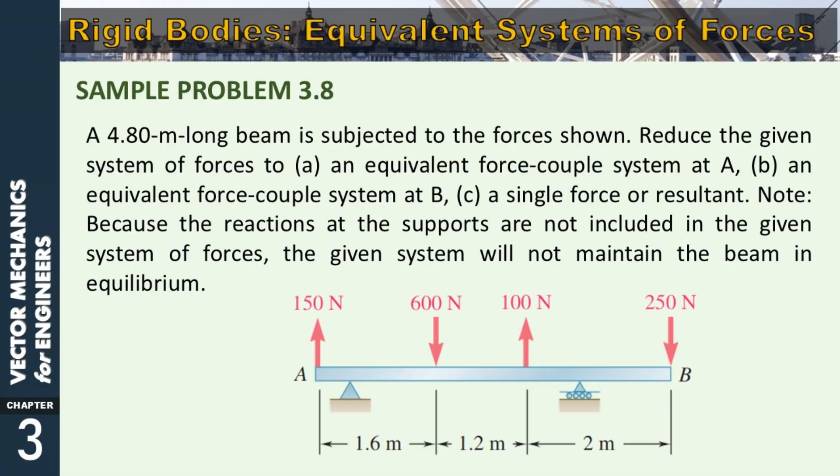We have here sample problem 3.8. A 4.8 meter long beam is subjected to the forces shown. Reduce the given system of forces to: for letter A, an equivalent force couple system at A; for B, an equivalent force couple system at B; and for C, a single force or resultant.

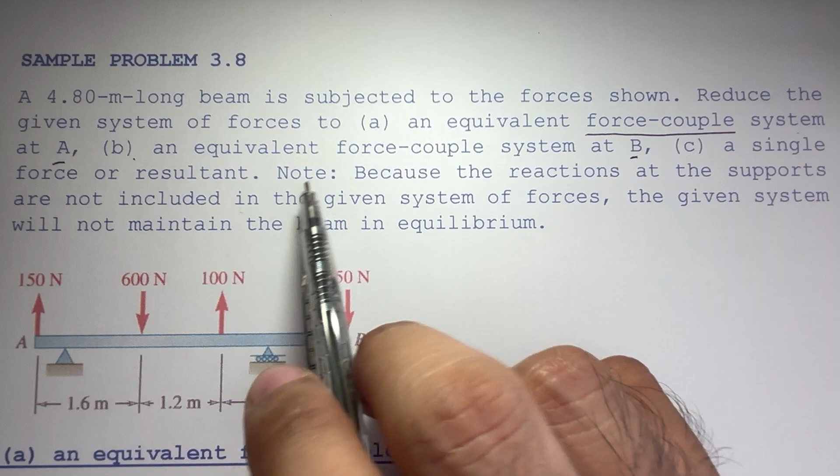Note, because the reactions of the supports are not included in the given system of forces, the given system will not maintain the beam in equilibrium. So for this example, our reactions at the supports are neglected. So for our forces, we have here our beam. If we try to redraw our system, our beam would have no reactions at the supports.

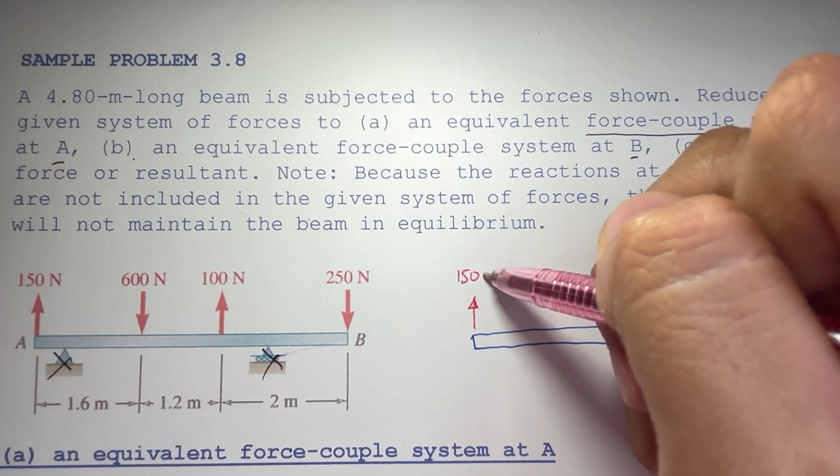So we have here our 150, since it is going upward, that means it's in the positive J direction, so we have 150J. For our 600, downward, we have negative 600J. For 100, we have 100J. And for the 250, going down, we have negative 250J.

For its distances from point A, this is point A, this is point B. Our 150 here, since it's located on point A, has no distance. For our 600, from point A going to that direction, we have 1.6 meters, so we have 1.6 positive I.

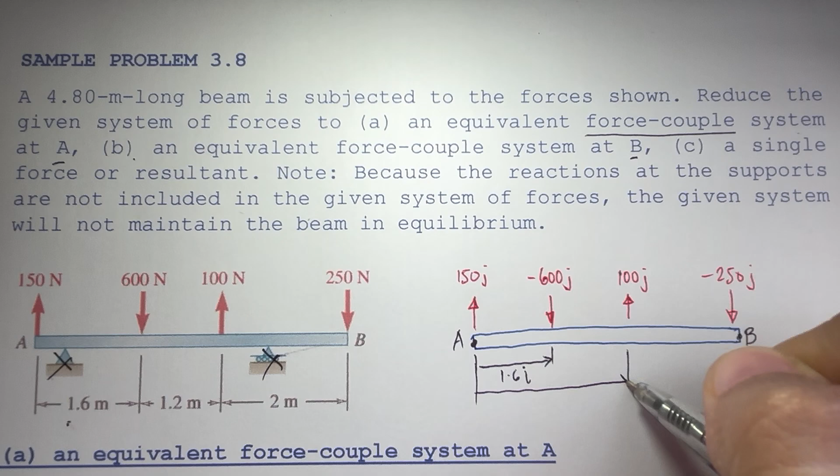For the 100, we have 1.6 plus 1.2, which is 2.8 positive I. And lastly, for the negative 250, from point A going to that direction, positive I, we have 1.6 plus 1.2 plus 2, which is 4.8 positive I.

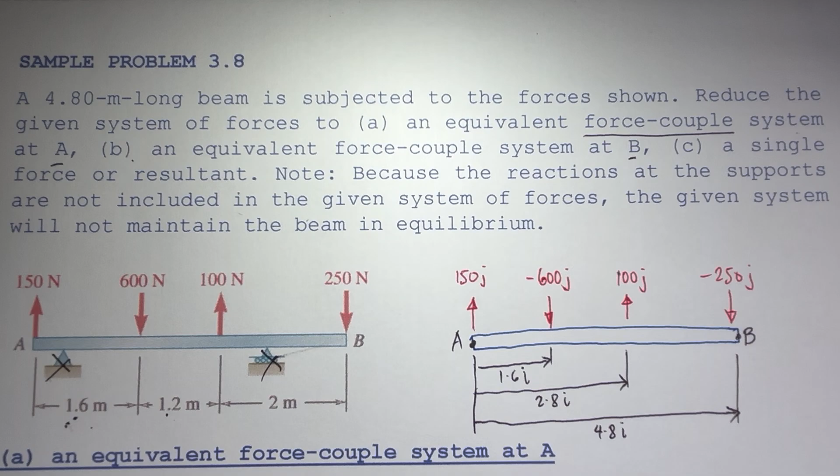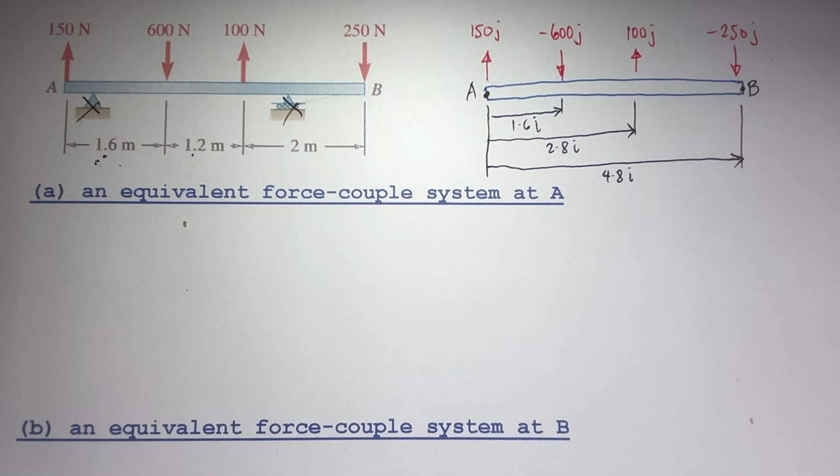So now let's start solving for letter A. What is asked here is to have an equivalent force couple system at A. So basically, if we have our beam, our original picture from A to B, what you want is to have a beam wherein the forces are replaced by a force couple located at point A. So these forces are being replaced by a force, say that force is R, and a couple at point A, say that is MA.

So to get our equivalent force couple, our force would be the sum of all the forces from our original picture. And to get the moment, we simply add or sum up all the R cross F pivoted at point A. So let's try to solve.

So to get R, we have the sum of all forces. What are the forces? We have 150J, that's positive, minus 600J plus 100J minus 250J. So that would mean our R is equal to negative 600J.

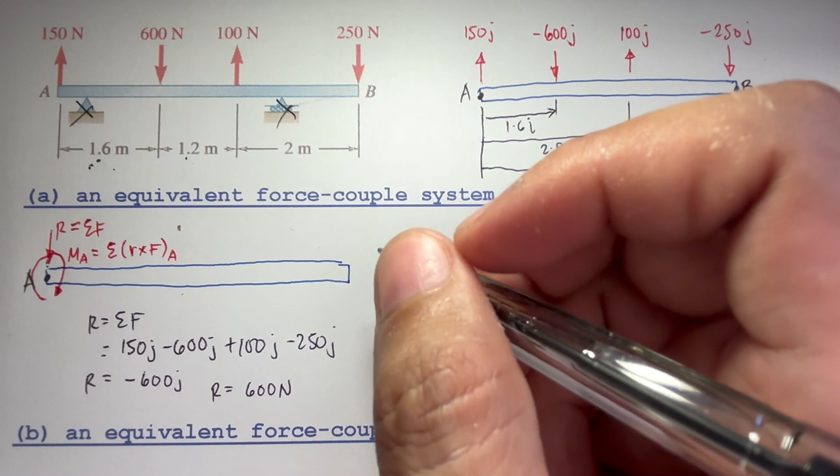That would mean that our force here is directed towards the negative J direction, so that would be going downward. So we have here our force.

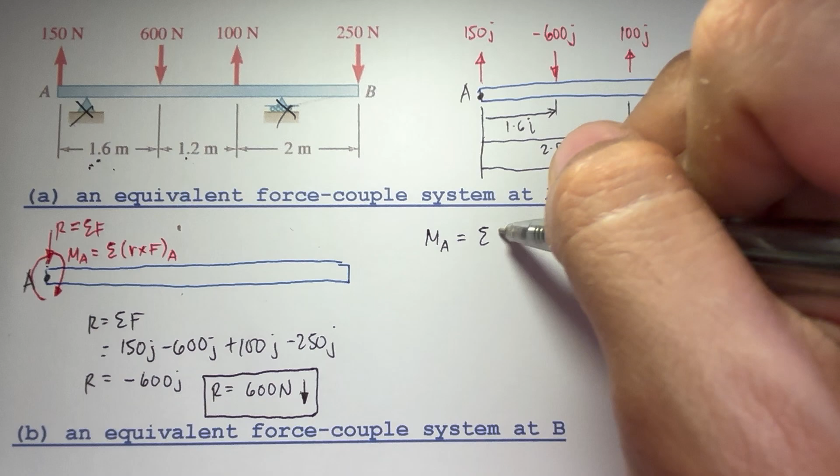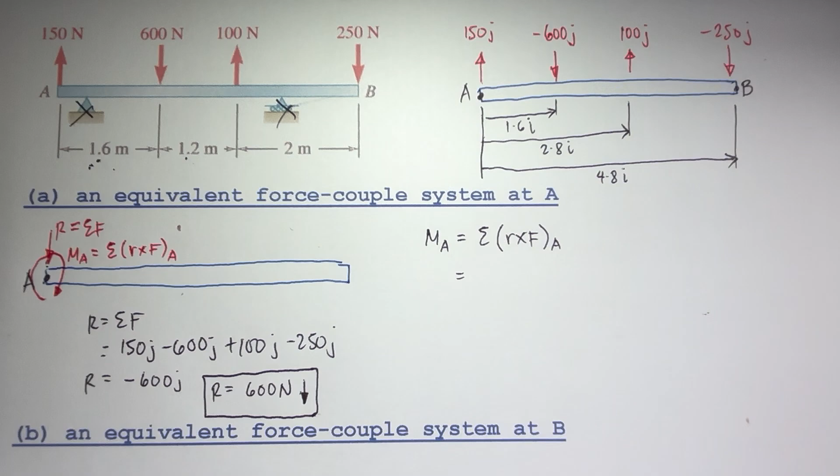So how about for the couple? Let's use that formula. Our couple at point A is just equal to the sum of the cross product of R and F pivoted at point A. So what are those forces? For 150, since it has zero moment arm here, that would be 0.

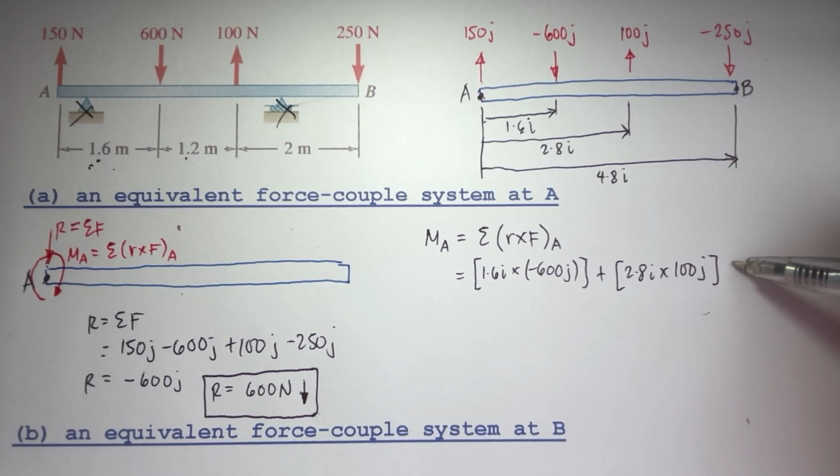The moment of negative 600 here would be R cross F, that is R, which is positive 1.6, times F, that is negative 600. So our first moment is 1.6i cross negative 600j. Plus our second force, the moment arm is 2.8i cross 100j. And lastly, we have 4.8i cross negative 250j.

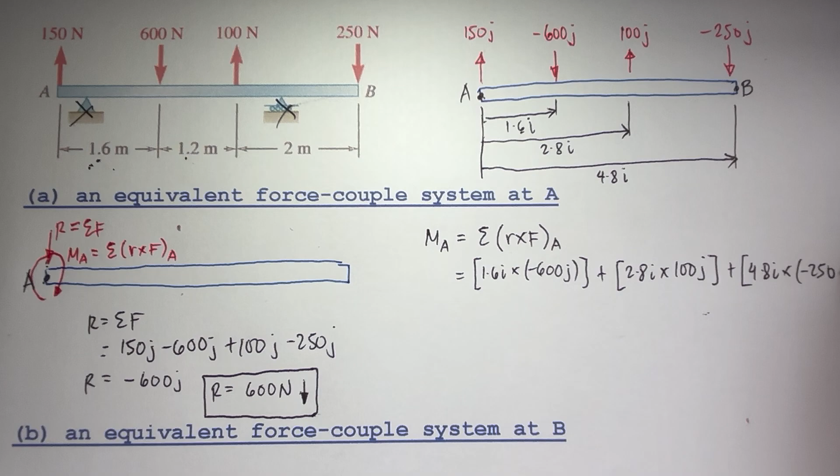Solving for the product of our first term, 1.6 times 600 is 960. So i cross negative j: i cross j is positive k, times negative, we have negative k. Next we have 2.8 times 100, which is 280. i cross j gives positive k, so we have positive k. And then lastly, i cross j is positive k, times negative, we have negative k. So we have negative 4.8 times 250, which is 1,200.

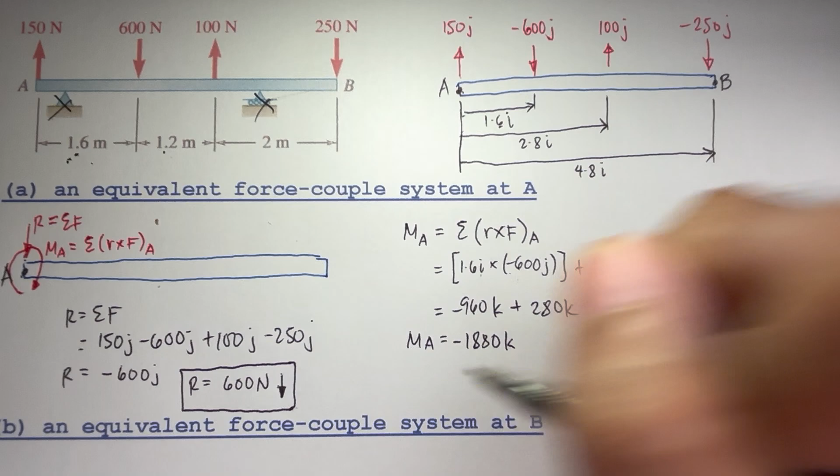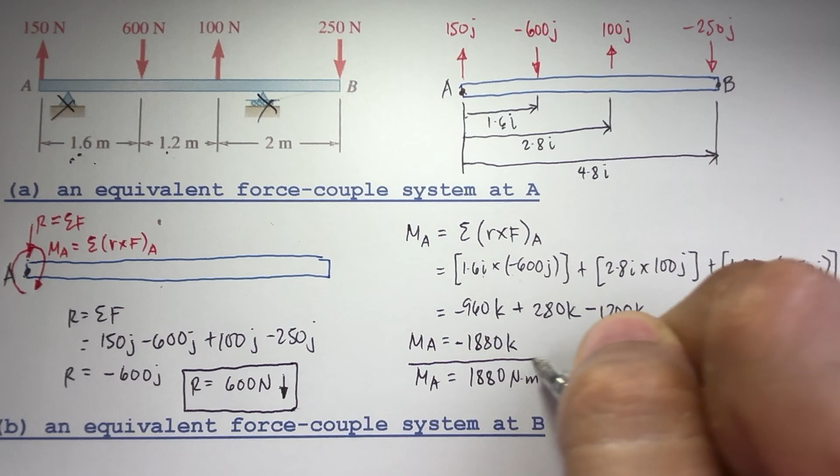1,200 negative k, so our moment pivoted at point A is negative 1,880 k, or MA is equal to 1,880. Since we have negative k, using the right hand rule, its rotation would be clockwise to have a negative k direction. So that's our couple, our force couple at point A.

Now, next, what we're asked here for letter B is to find an equivalent force couple system at B.

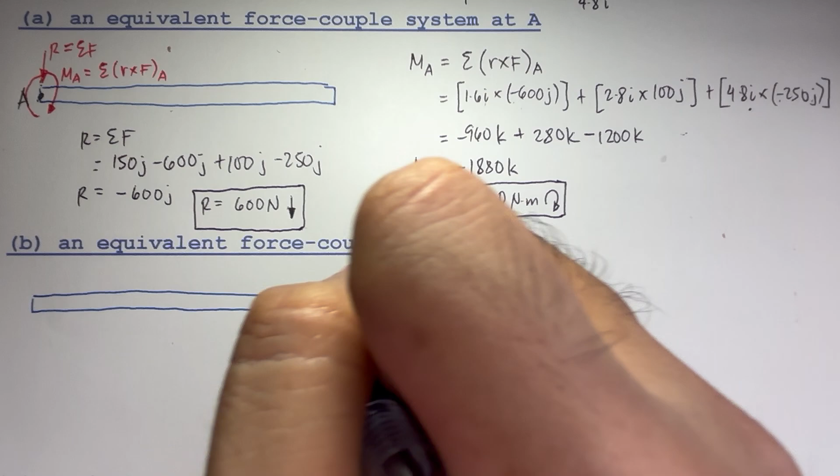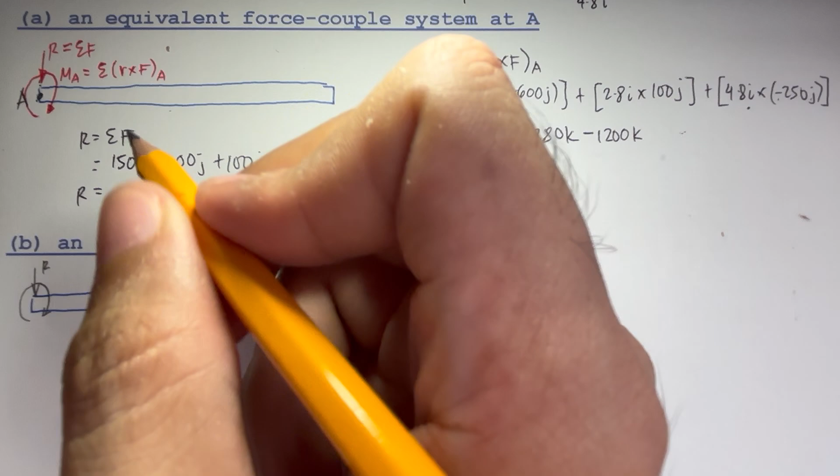If we have our beam here, in the original picture our force is going downward. This is our force, and our moment here rotates clockwise - that's our couple at point A. This would be our point A, and here is our point B. What we're asked here is to find the value of the equivalent force couple system at B, so we need to transfer this force and this couple to point B.

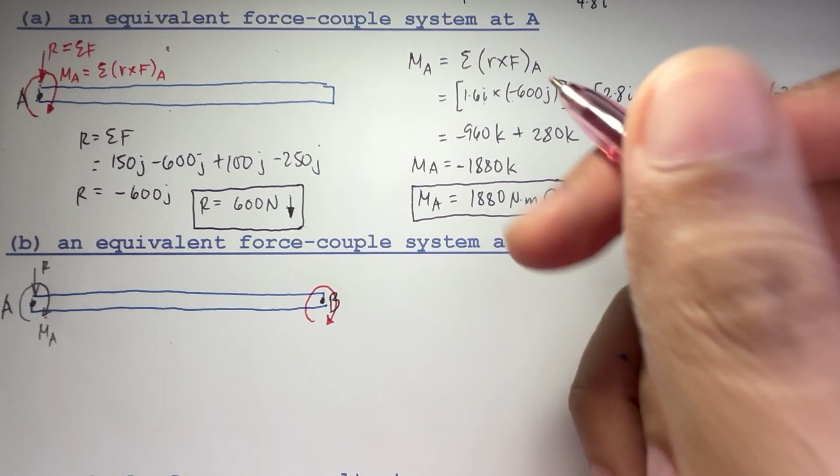Since our couple here is a free vector, transferring it from point A to point B means adding nothing. We simply transfer this moment to point B and nothing would be added. So we transfer our moment A to B here. Therefore, our moment B would be equal to moment A, since it's a free vector - transferring moment A, nothing would be added.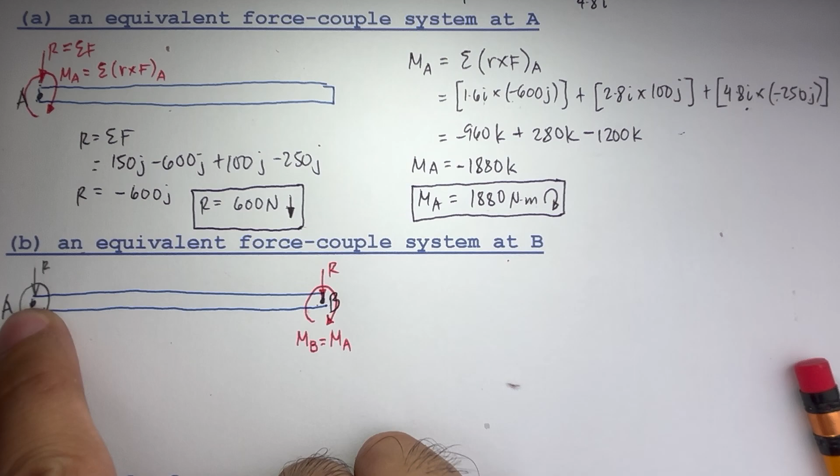But if we transfer our R here, because what we want is an equivalent force couple system at B, if we try to transfer our force from point A to point B, that would be the same force R. But transferring our force from point A to point B, where the direction of our force, or the point where we transfer to point B, is not along the line of action of our original force at point A, that means we should add an additional moment to our couple here. So we should add an additional moment, that would be R cross F.

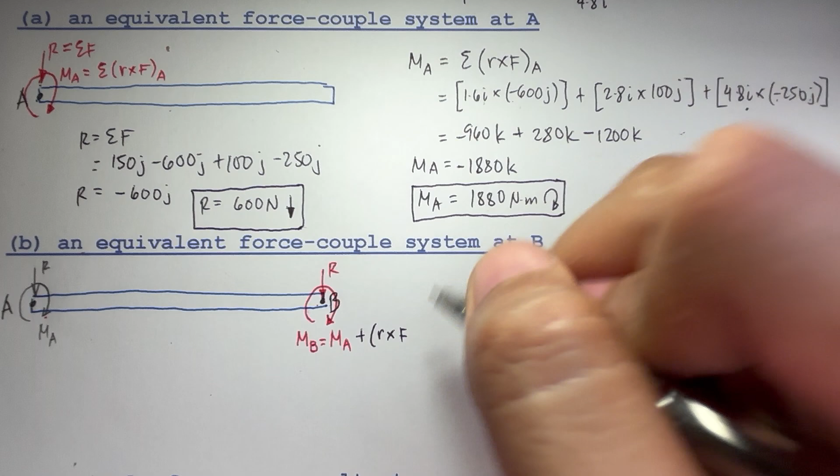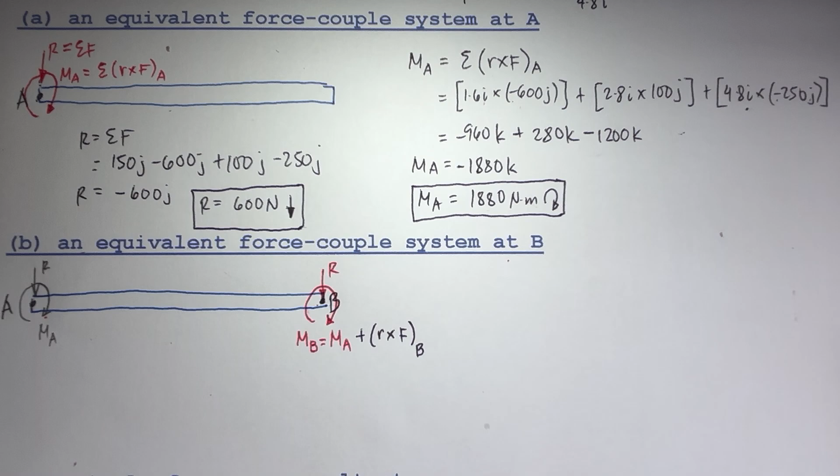R cross F pivoted at point B. So if that's pivoted at point B here, our R, the moment arm, should be from point B going to point A. So this would be our vector R. Our R here is simply just this distance.

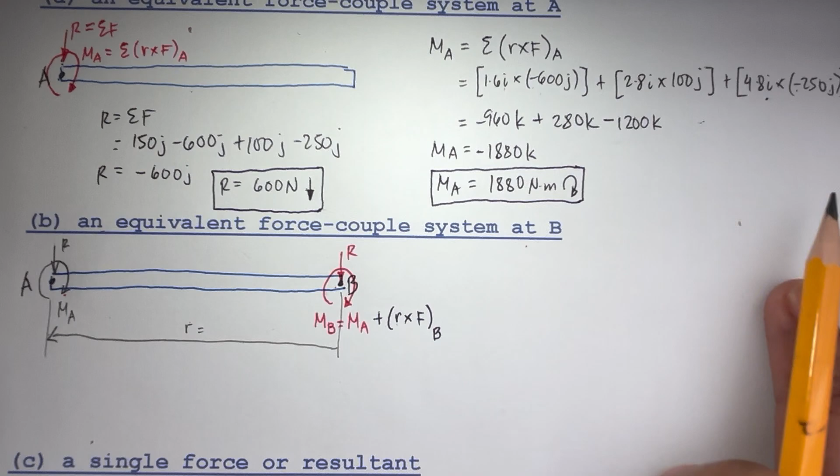What would be that distance? That is about this one here, 4.8. So 4.8, 4.8. And since that is from right to left, this is negative I.

So to get the force couple, we need to know what's the force. Our force here would be the same, that is 600 newtons going downward, or negative J.

How about the new couple here? We have MB that would be equal to MA plus the moment R cross F with a pivot point at point B. So substitute: we have MA that would be equal to negative 1,880 K plus our R, which is negative 4.8 I, cross our F, which is negative 600 J. So we have negative 600J and negative 1,880K.

Negative times negative is positive. I cross J gives positive K. So we have positive 4.8 times 600, which gives us 2,880 K. So negative 1,880 plus 2,880, our MB is equal to 1,000 K, or our MB is equal to 1,000 Newton-meters.

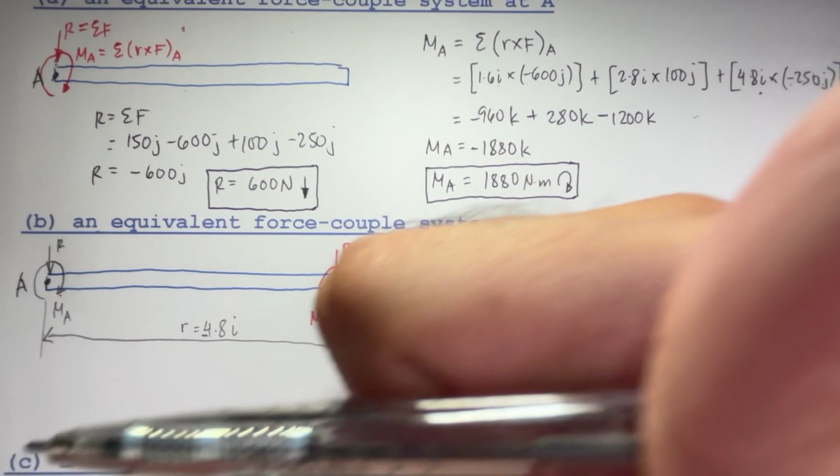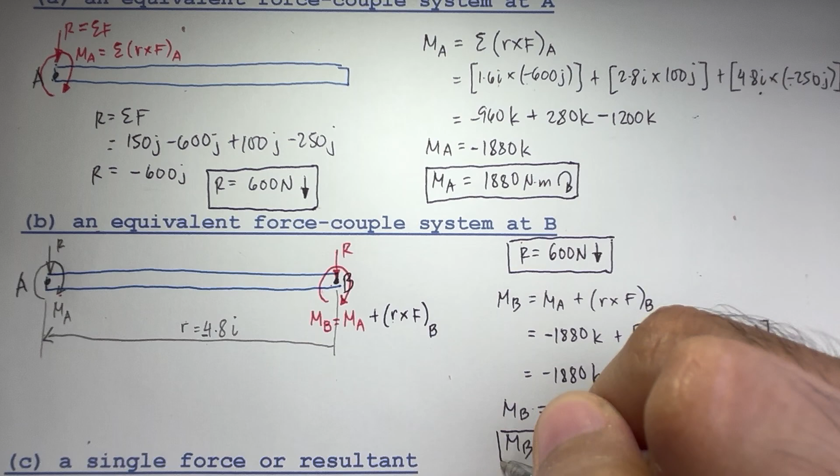Since it's positive K, using the right hand rule, we have a counterclockwise direction. So this would be our moment - the force couple system at point B.

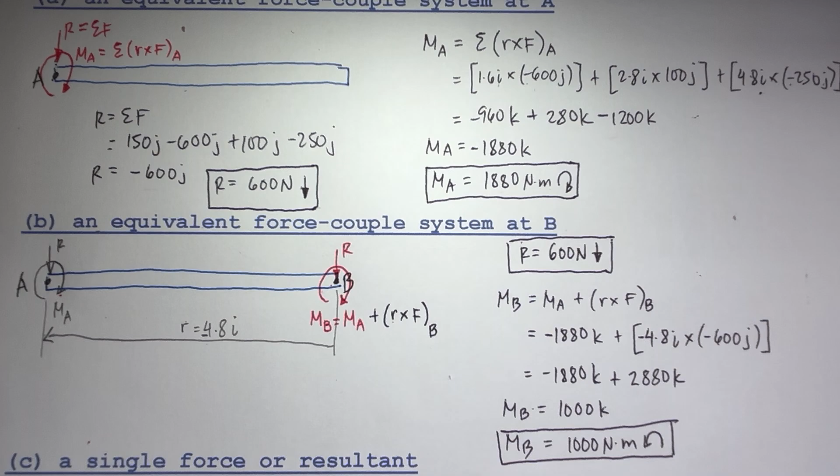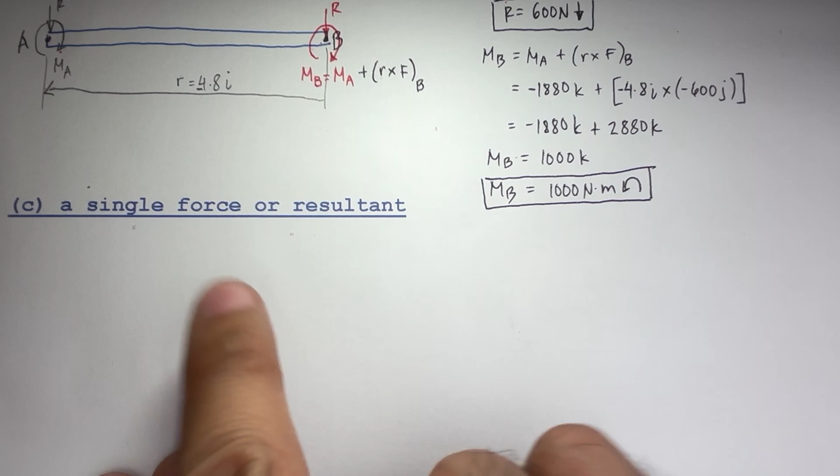Now, lastly for part C, what we are asked here is to find the value of the single force or resultant, and at what distance this force should be located in order for our couple to be eliminated.

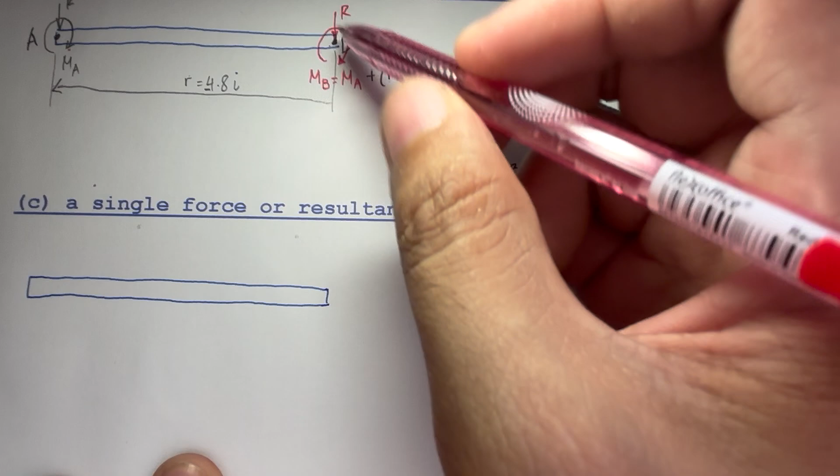So if we have here a beam, from our picture on top, we have our force directed towards the negative J direction, and that is equal to 600 newtons. Our couple here, instead of clockwise, we have counterclockwise rotation, so that is 1,000 newton-meters.

What we want here is to transfer or create an equivalent system wherein there is no couple. So we need to transfer this R to any point here such that its couple would cancel. If we try to transfer it from point B, say this is point B, to point C, this would be the new location of our single force where there is no couple.

So transferring R, and transferring our couple of 1,000, we know that a couple is a free vector, so transferring it would mean there is no additional couple added. So transferring this couple, we have 1,000, or let's say 1,000K. And for our resultant, if we transfer this force to this point, that would be the same force, 600, or negative 600J.

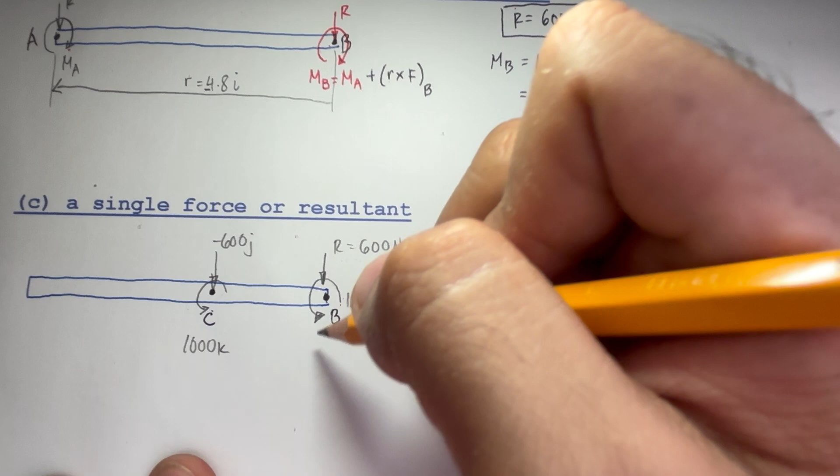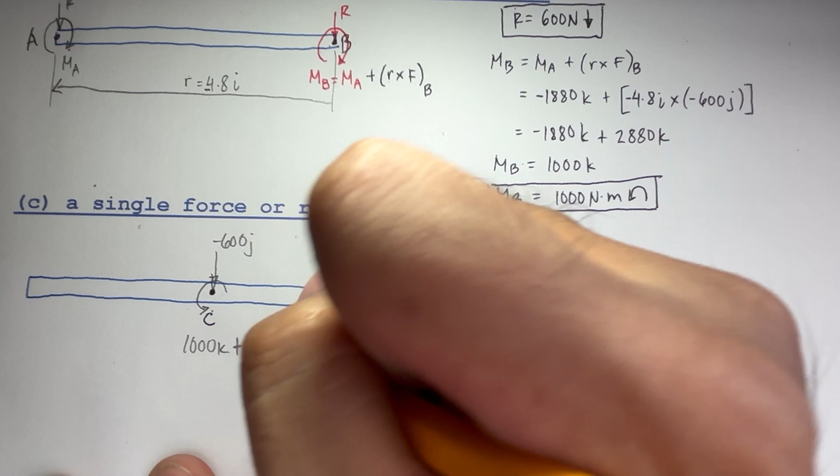But transferring it from point B to point C would mean that an additional couple should be added. If we try to transfer a force to another point, as long as the point is not located along the line of action of the original force, additional couple or moment should be added. So we should add an additional moment here, which is R cross F, pivoted at point B.

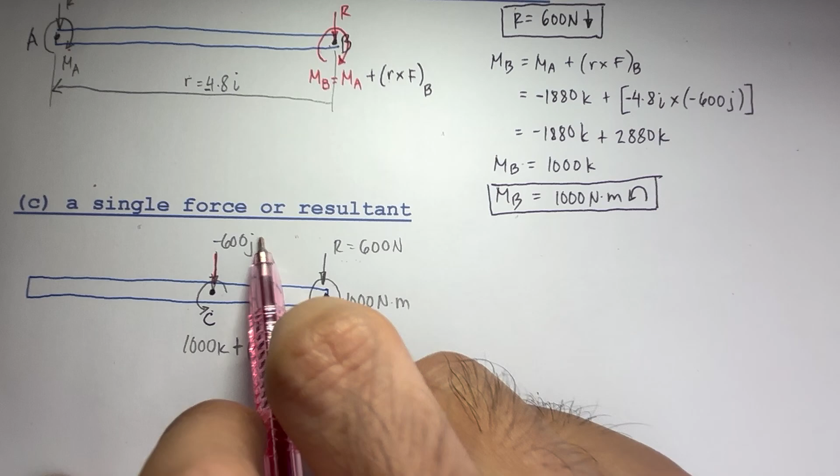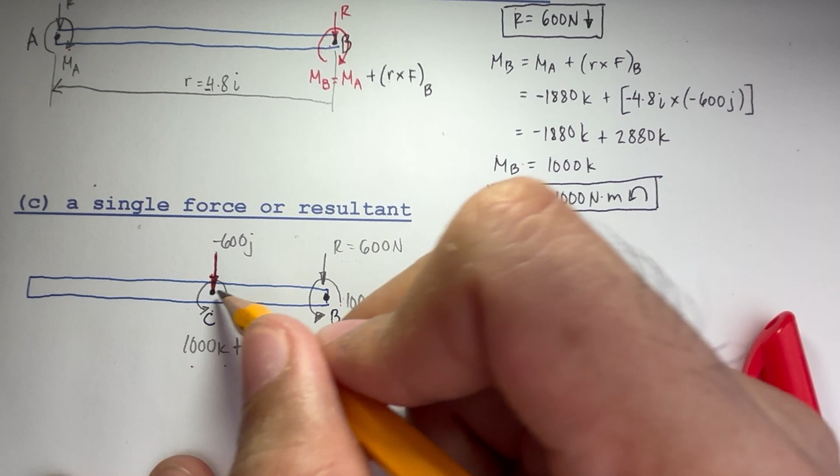Now what we want here is a system with a single force without any couple. So our force would be the same, 600, but if we add 1,000K plus R cross F, that should equal 0 in order for the couple to not exist at this point. So for the force, that will be the same force, negative 600J.

How about for the couple? For the couple, we have 1,000K plus R cross F pivoted at point B, and that should equal 0 in order for the couple at our new system to not exist. This should be pivoted at point C, going from point C to point B. So what would be this distance here?

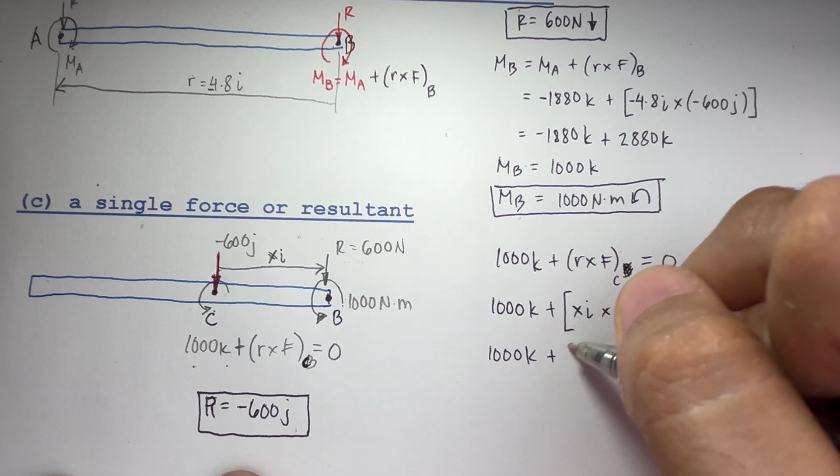Since from point C to point B that is going to the positive x-axis, we have R as positive Xi. So if we try to solve this, we have 1,000K plus R, positive Xi, cross F, negative 600J, that should equal 0. So we have 1,000K plus I cross J, which is positive K, times negative, giving negative K. So our answer here is negative X times 600, giving negative 600X, equal to 0.

So we can cancel K. We have our 600. If we transpose negative 600, that becomes positive, so positive 600X is equal to 1,000. Divide both sides by 600, and our X here is equal to 1.67 meters. So the distance from point C to point B is 1.67 meters.

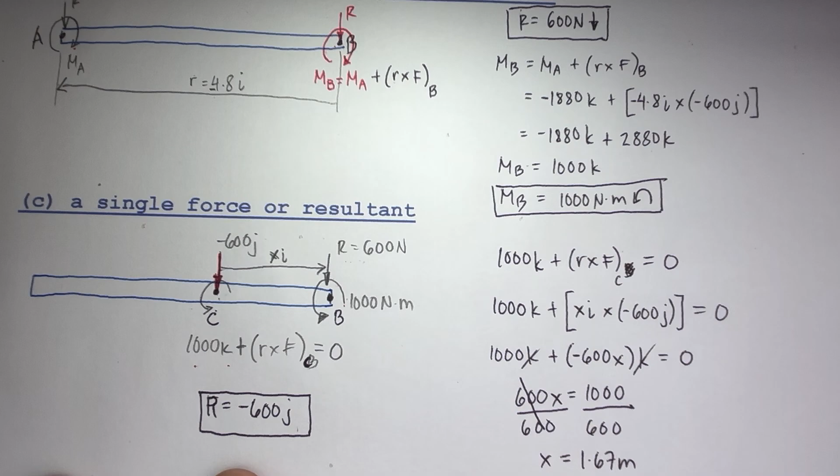So if you want to know the distance from point A to point C, let's call that distance D. That distance D is just the total distance, 4.8 minus X, equal to D. So we have 4.8 minus 1.67, giving our D equal to 3.13 meters.